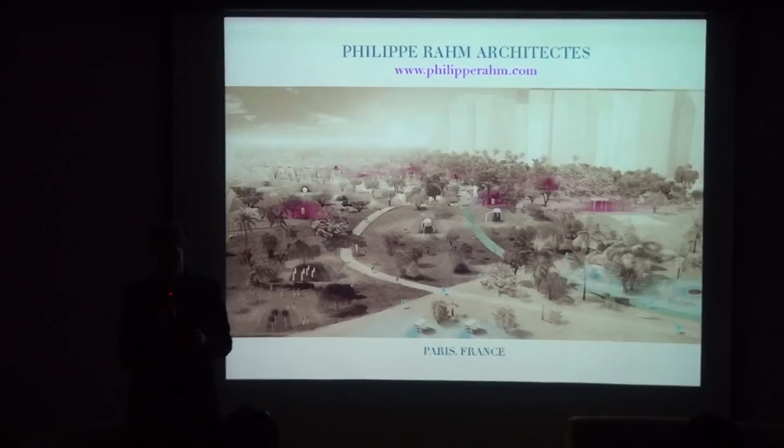It will be a different project. Of course, I will present the Jade Eco Park for Taichung. But before that I will show some other projects, and try to explain a little my position about architecture, how I consider architecture. I don't know how we could do this.

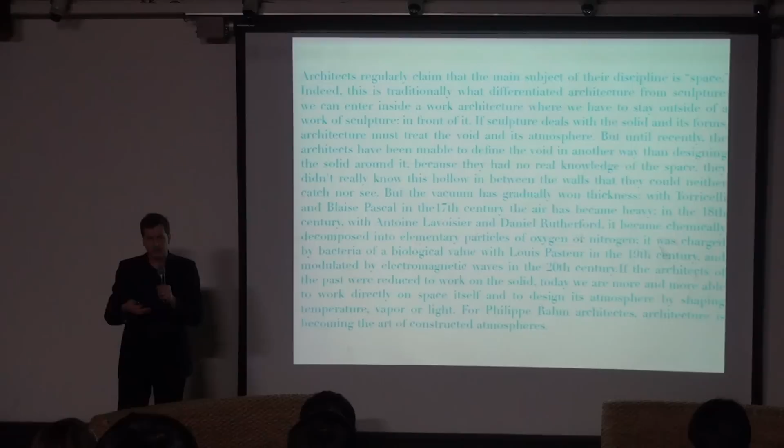And during the 18th century, we also discovered that the air is not one element, it's not something unique, but it's composed by different gases like nitrogen, like oxygen, and it means that there is a kind of chemical quality inside this void. Then later, during the 19th century, we discovered that there is also some bacteria, some virus inside, so there is a kind of biological life. And during the 20th century, we understand that there are electromagnetic wavelengths, like the light, the mobile phone electromagnetic waves, all these invisible waves that are inside the space.

So it means that in reality, the space is a real material. It's not empty, it's a real material. And as an architect, maybe you could start to design the space itself. You could think maybe before, because we didn't know what was the space, so we designed the envelope of the space. We were designing the wall, the ceiling, the solid around the void. But today, we have the knowledge and we have the tools also for starting to design the space itself like a material.

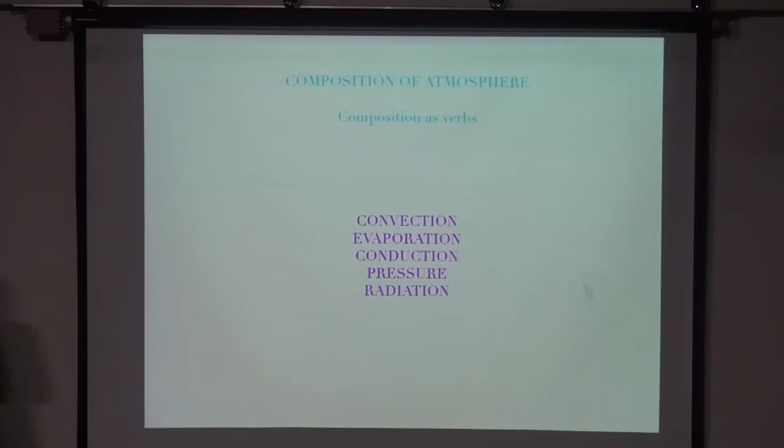So traditionally, when we as an architect, you were working with elements of architecture. During the 19th century, there were some encyclopedias or dictionaries that showed the different elements of architecture, like a column, a wall, a stairs, a room. That was like solid elements to compose, like elements of architecture. And then you have also elements of composition, like symmetry, asymmetry, or addition. For example, you add a column, or multiply the column, or you add one room to another room, so it was like elements of composition.

But today, we could think that maybe we could move from the solid to the void and start to think that the element of architecture could be the emptiness, the element of the space itself. So the element of architecture could be today heat, light, temperature, humidity. It could be all these elements that compose the space itself, where we are really, what composes really the architecture and the space. And the element of composition, maybe it could be no more like symmetry or addition or inclusion or multiplication, but it could be some meteorological phenomena like convection, evaporation, conduction, pressure, radiation, all these elements that make movement with the element of architecture.

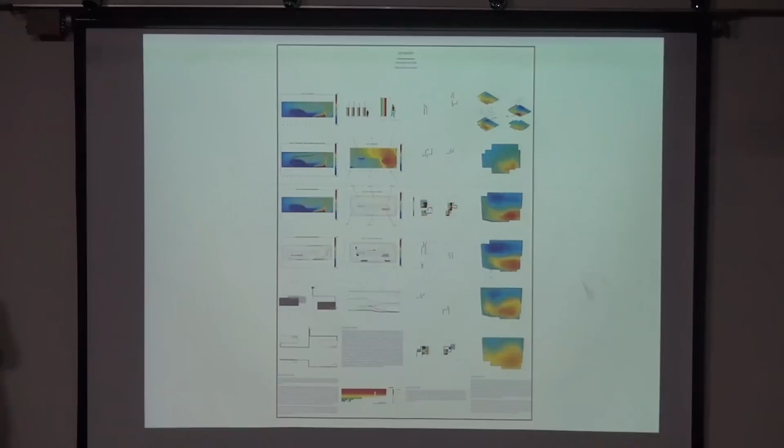Some other projects are based on evaporation, so it's because there is all this question of humidity in the air, and one of the challenges of architecture design is to deal with this humidity, like with the ventilation, or to put some fresh air and to move the exhaust air somewhere else. So we work on this kind of element.

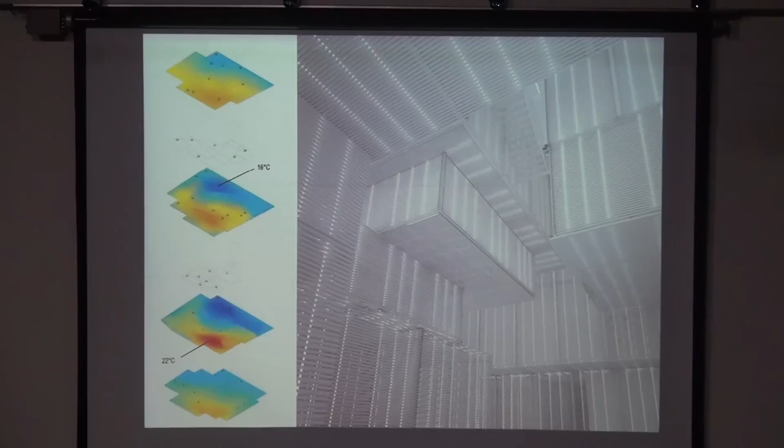So I would like to be more clear maybe by showing a first project we made in 2008. So it was at this period we start to analyze convection as a design tool for doing architecture. And for this project, we start with two different criteria. The first criteria was a Swiss criteria, a Swiss recommendation, Swiss standard to economize energy and to reduce oil consumption and in order to reduce the greenhouse gas effect.

And for this, there is some precise minimum and maximum temperature according to the clothes and according to the movement of the body. And for example, this is something obligatory for public buildings, and this is something like recommendation for private buildings. But it says, for example, that a corridor or stairs, could be warm. This is for a cold country. In Switzerland, you need heating system all year except a few months during the year.

But it could be exactly the reverse position for Taiwan because it's with air conditioning, not with radiator, but with air conditioning. But here it said that the corridor, the stairs, could be warm only at 15 degrees Celsius, normally in a normal condition you need 21 degrees Celsius. It's like the minimum standard of comfortable temperature. But they say in reality for the stairs it could be warm only at 15 degrees Celsius, because you don't stay a lot of time inside the stairs, and you also move the body and create your own energy by moving the body. So it could be only 15 degrees Celsius. So it means that if you don't warm the stairs at 20 or 21 degrees Celsius, but only at 15, you will economize 6 degrees all year. So it means at the end it will be a big economy of energy.

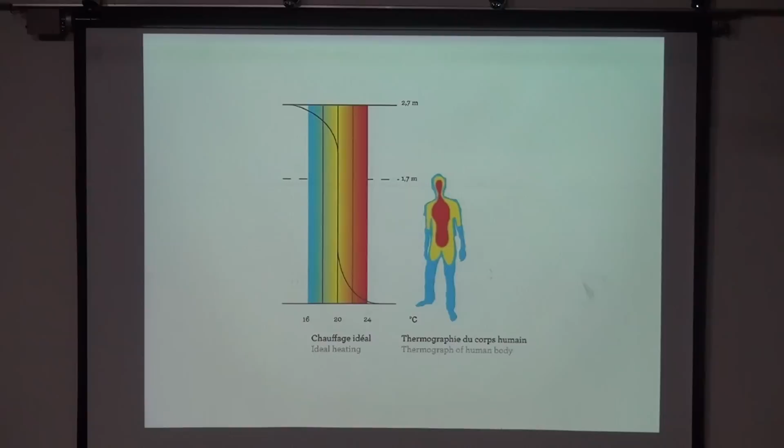Is it possible to create this reverse curve? In nature, there are some phenomena where this reverse curve exists, like currents such as the Gulf Stream in the sea, because it's linked to the difference between salt water and non-salt water. Since non-salt water is lighter than salt water, it creates the Gulf Stream in the ocean.

We propose to build a kind of meteorological section, and we introduce two radiators at different temperatures: a warmer radiator and a colder radiator. By creating this imbalance—moving the warm radiator down and the cold radiator up—we start to generate a flow of air that moves, touching the cold surface and going down, generating a stream.

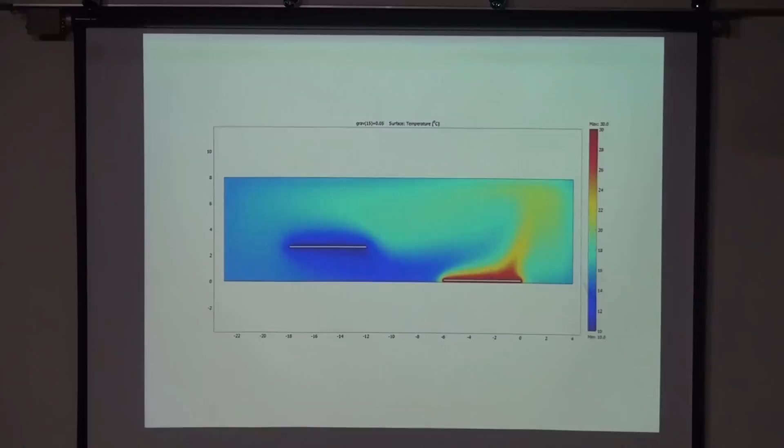For this project, we start to think that the whole building will become like a meteorological climate. We have introduced in the section the lower part of the building's temperature at 15 degrees Celsius, which could be stairs but also storage. And we introduce the higher part of the building that has to be the office, the working space. We place them inside the section, and then it generates an entire climate inside the space.

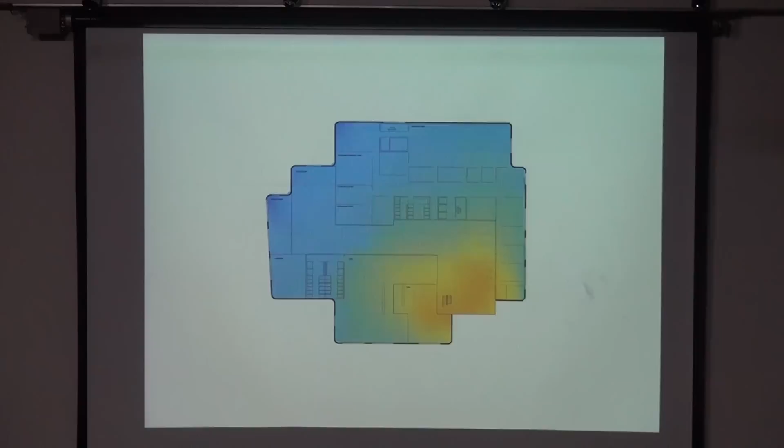So it means that we follow the movement of the temperature inside the building, through all the space, all the stairs—this is the first floor, second floor—so the heat becomes bigger.

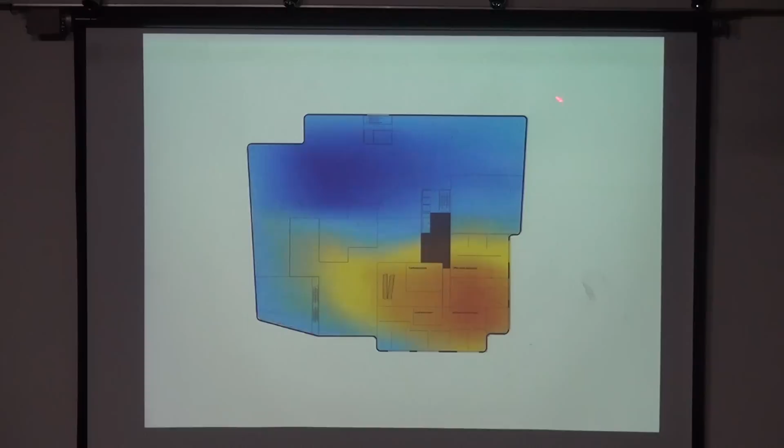So the storage changes shape, and the exhibition room is here, and by going higher the warmer space becomes bigger, the storage becomes smaller, the exhibition room is in between. At the top of the building is a very little colder area and a big warmer area. This is how the shape of the building is organized according to different temperatures, and all the form moves through the plan to find different temperatures.

I will very quickly just show this project. It was a little the same idea to work on meteorological phenomena, but if the first project was inside, this project deals with outside conditions, because it was a very big building that would create a lot of shadow on the north, on social housing that are there. So we proposed to dilate the space between the rooms, to let the sun go through to the social housing behind.

And we did the same strategy for the wind, because we have a cold wind coming from the north that would be blocked by the building. We proposed to open the building to let the wind go through, so it would not stay cold at the back of the building. By opening space between the rooms, we use it as a tank for creating fresh air that could be naturally warm during winter or cold during summer.

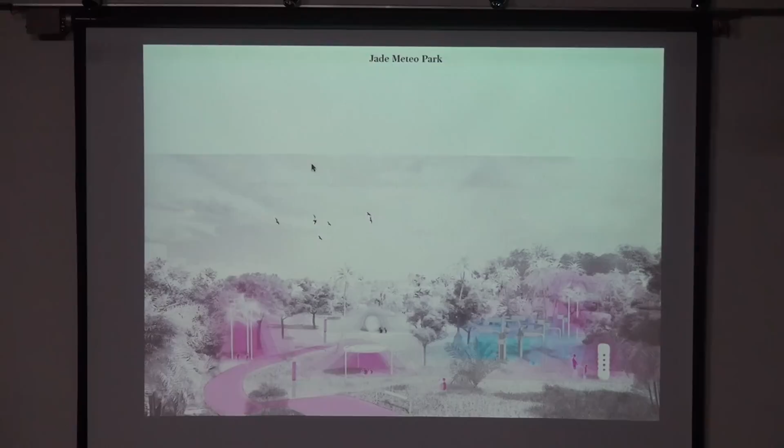give the clean and a more cool and more dry area. So for doing this, we start to think that these three elements, the most important climatic elements to do the park, will be the heat, the humidity, because it's warm and it's humid, and the pollution. So how to deal with these three targets? And so we first start to think on the site.

On this site, is there some place where it will be a little colder than some other? The sun will be always the same, the temperature will be always the same. There is only one factor that is a little different: it is the wind coming from the north. We know that there is a north wind coming from the north that is blowing all the year, and also during the summer. Of course, during the summer there is a southwest wind that comes from the sea, but there are a lot of days also where there is still the north wind coming there.

So this cold wind, the temperature of this cold wind is a little lower than 32 degrees, because we know that 32 degrees is a limit. When a wind is warmer than 32 degrees, it becomes not comfortable, it's a warm air. But if it is lower, it will bring freshness like a fan, and it will affect the comfort of the body, the perceived temperature, because it will refresh the body by the movement of the air.

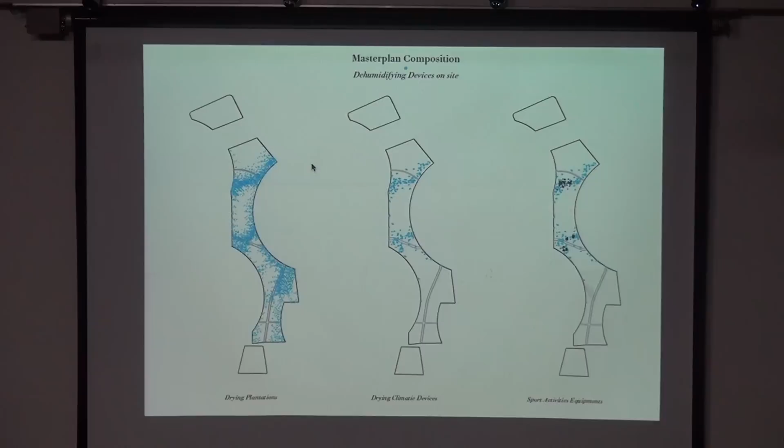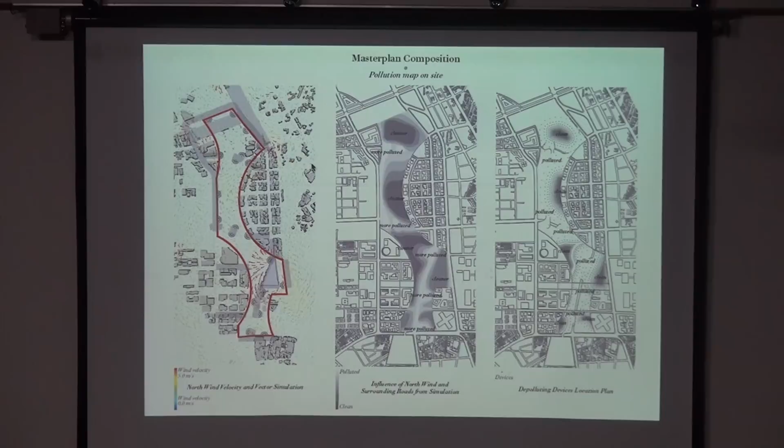So it means that from this climatic analysis we have generated 3 maps, 3 layers, and these 3 layers overlap together and create some different situations.

So it overlaps, and it also generates different qualities. Sometimes it will be cool and dry and polluted, or cool, dry and non-polluted. So it generates a diversity of areas that will be the richness of the quality of the park.

And then we propose to have 3 main roads inside the park that connect all these microclimates together. There is the blue path connecting all the sport and dry areas, a path that goes on the hill and down, more for sport, for jogging.

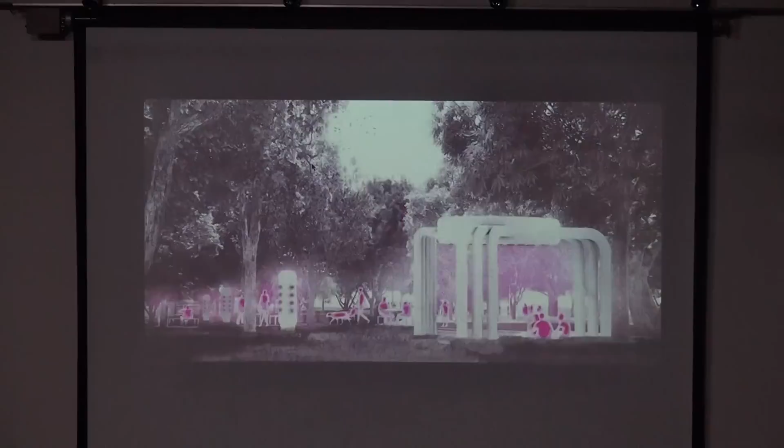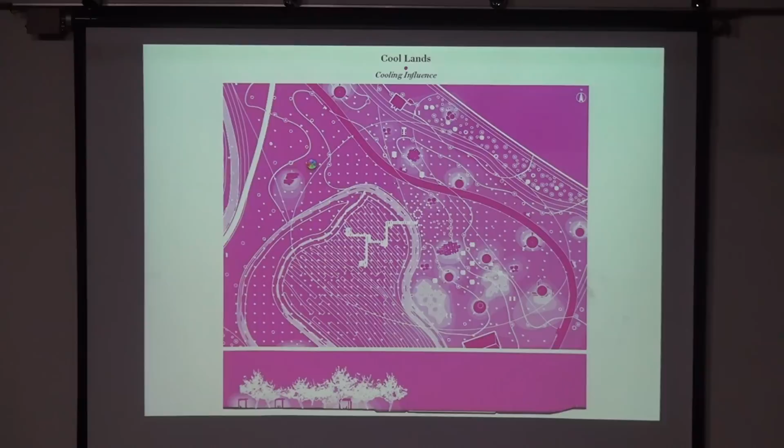And this is the Cool Lands. We have 4 Cool Lands in the park, and these Cool Lands will be the place where there are a lot of trees, cooling trees, and a lot of cooling devices that will be there. We wanted to give an identity for each of the Cool Lands, and we tried to find trees and choose them according to their cooling type, cooling capacity.

So some trees will have a lot of leaves, it's big and creates a big shadow. Some of them have big leaves that create a large shadow. Some are white leaves that reflect the sun, and some others evaporate water, so it's cool because it's like a fountain, creating a cooling effect. So the choice of trees is in order to cool the area. It's a precise choice, and we find one more specific tree for each Cool Land.

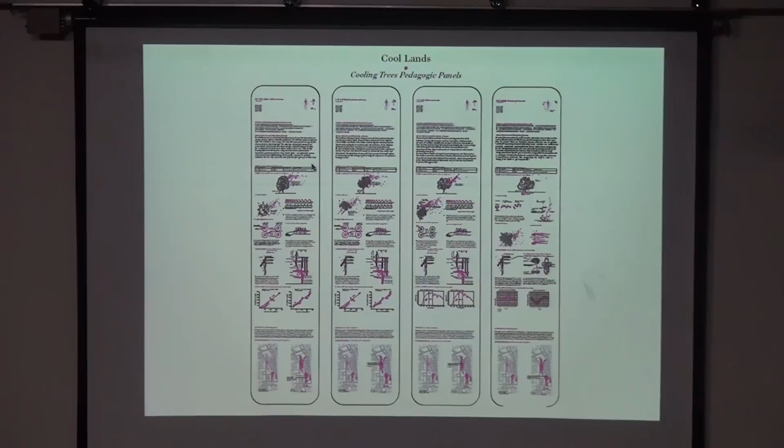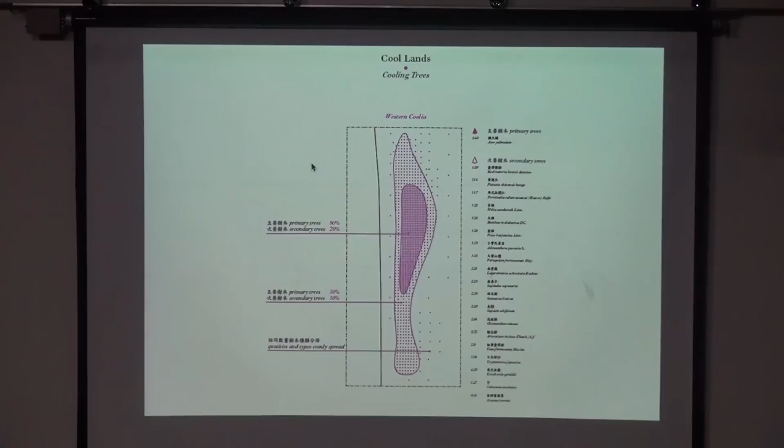And in this area, when you go inside, you will find also some architectural devices. The total is like 260 devices. Half is passive, like a structure, a shelter against the sun. But some others use different meteorological techniques to cool the air - some use pressure, so it blows cold air. Some others are like artificial rain or cloud, blowing mist or droplets, and when there's evaporation, it takes energy from the air, refreshing the area around it. Some of them work by radiation, a cold network of water that runs through, and you could approach and touch this cold surface. And some, like this, are just passive.

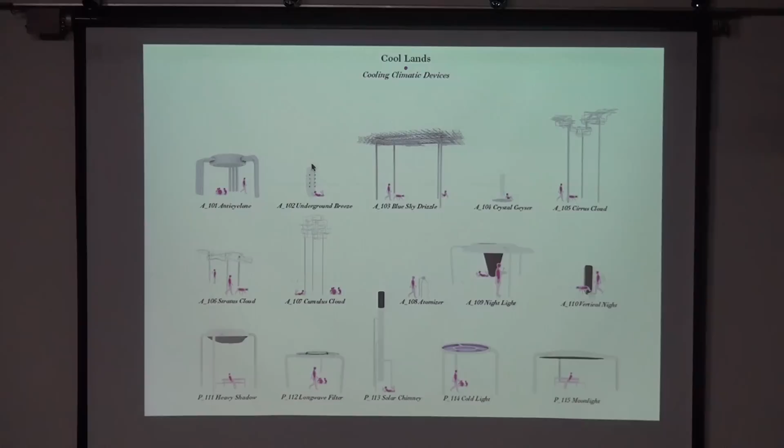I would like to present only two of them. So the first is anticyclone. This device will blow some cold air, and of course everything in the park...

We have 7,000 square meters of photovoltaic panels on the north of the park, and we will use this green energy for all the lighting.

I will show it later, but for these devices we have only natural passive cooling, so we have only a fan, and we have studied with our engineers all the influence at different moments of the year to see what the size of the pipe should be, the quantity of air, and the speed of the air.

The technique is very traditional, because it takes the air, and the air goes through a heat exchanger with the city water, because the city water in Taichung is around 27 degrees all year round.

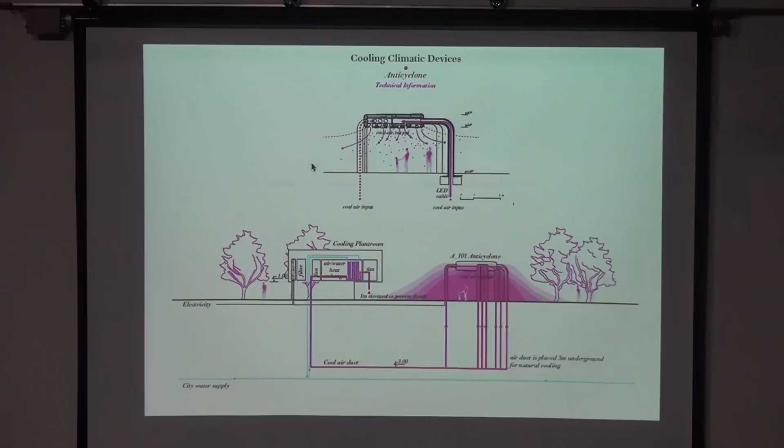Another device is what we call cloud. We have different types of cloud. It's an evaporative device.

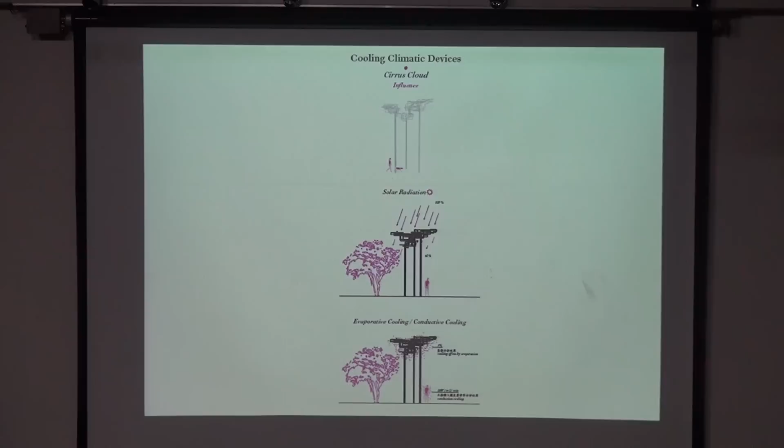So it will be a mist of water, and when there is this change from liquid, a small droplet of water, when it goes out and evaporates, it takes energy from the air and cools the area.

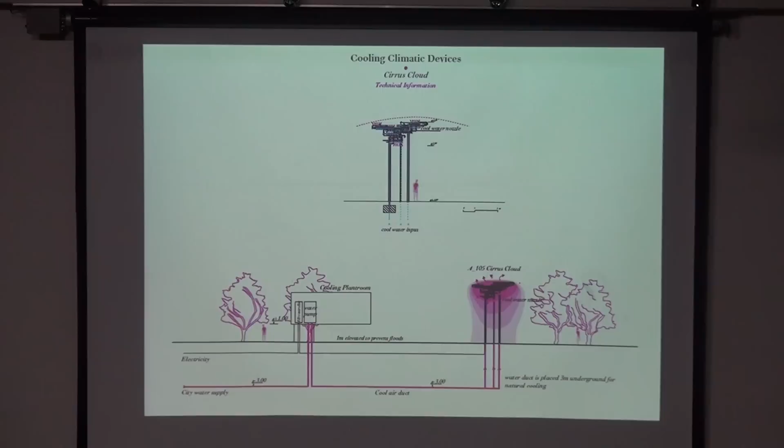So it's a more traditional device because it's a little like a fountain or jet of water in a park.

For the dryer, for the most humid areas, we have all these drying trees, and we add also some different devices.

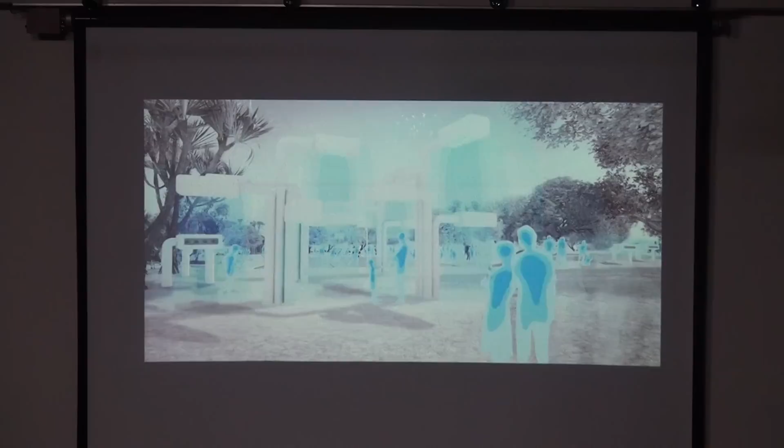This is one of the devices, we call it dry cloud. This device will provide some dry air in the space.

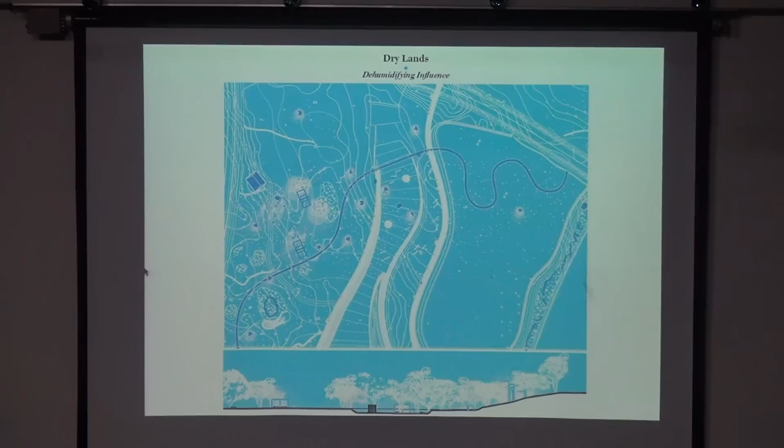But just to explain, before the dryer, we also have some different trees that will absorb the humidity of the air with their floating roots.

This is a shelter against rain, and this is the one device that blows dry air.

This device uses, so it's the most complicated technique we have for doing this, but we use air and it goes through a silica gel bag, so it's also a natural way of cooling.

The silica gel absorbs the humidity, but after the silica gel bag is full of water, we need to dry it with a network of warm water that goes inside, and so the bag has to stay without action for a few hours.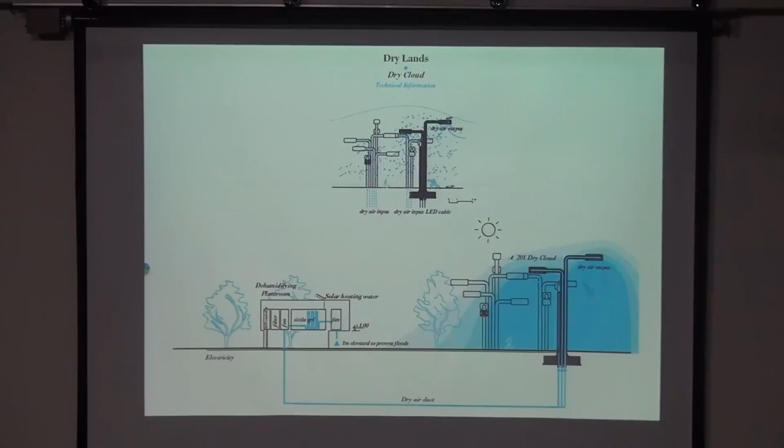And then the dry air will be blown from the devices in the park.

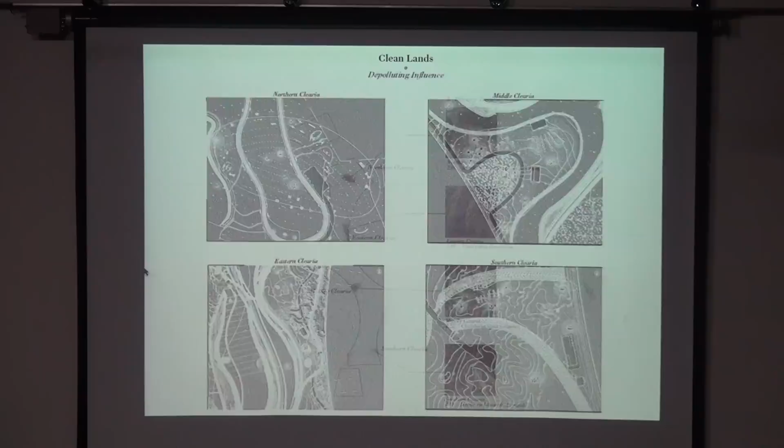And for the last map, we have what we call the clear area. We have 4 clear areas, so it will be the less polluted and most clean area in the park. For this clear area, we chose specific trees that have a depolluting action - trees with a lot of hair that catch pollution in the air, trees that absorb gas pollution, or trees with a big trunk to absorb noise. We gave different specificity to these trees for the 4 clear areas, according to different depolluting trees we find place there.

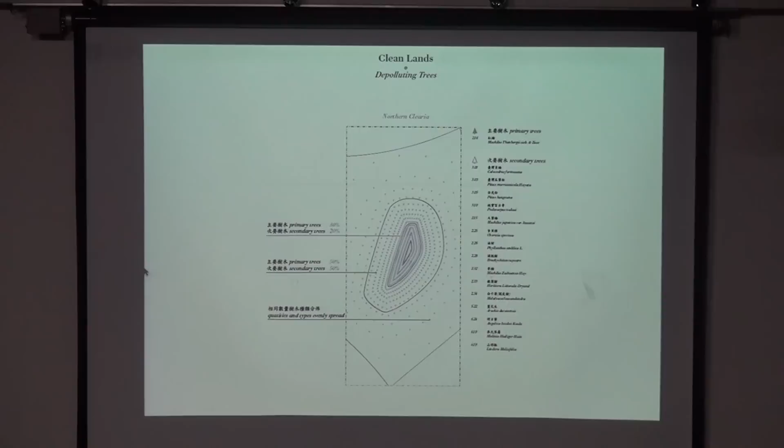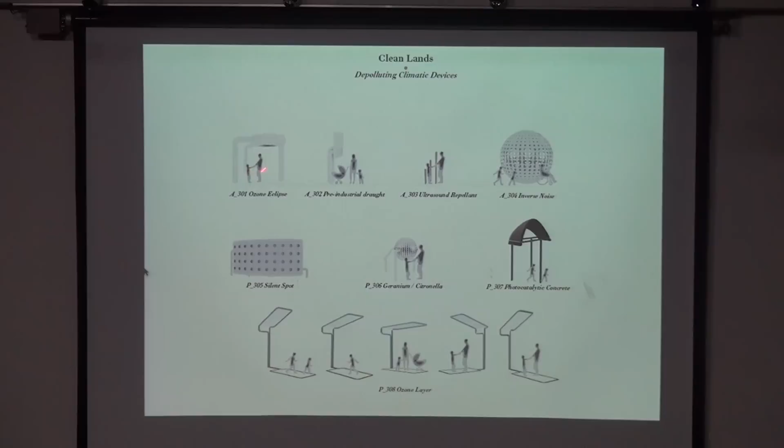And so sometimes in this grid we change one-to-one architectural devices. That could be a noise or sound wall, or it could be photocatalytic rocks that transform and absorb the pollution of the air, or it could be one fan that blows some clean air. This is like the ozone eclipse - like an eclipse of pollution inside the air.

And so this is a device where we take the air from outside, and then it goes through different filters - the gas filter, NOx filter, O3 filter, or particle PM2.5 filter - and then it goes down and flows clean air under the devices.

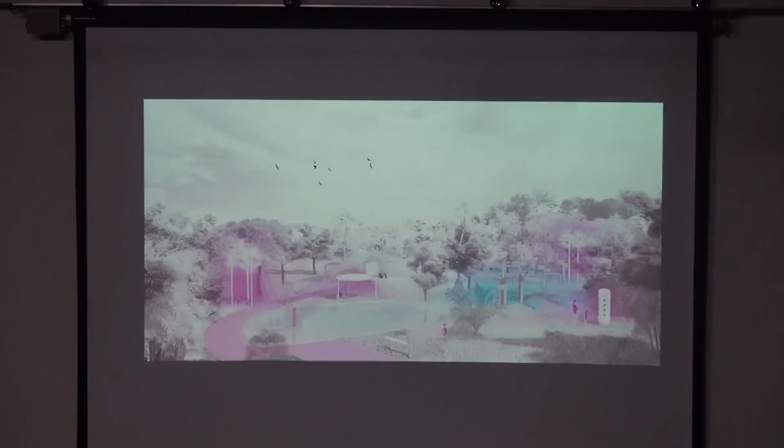So quickly, I would like to show how there is a kind of intelligent system for the park, because we will have a grid where every 50 meters we have a sensor that will measure in real time the temperature, the humidity in the air, the pollution in the air, the noise, and the wind, and everything. And this sensor gives information to the computer.

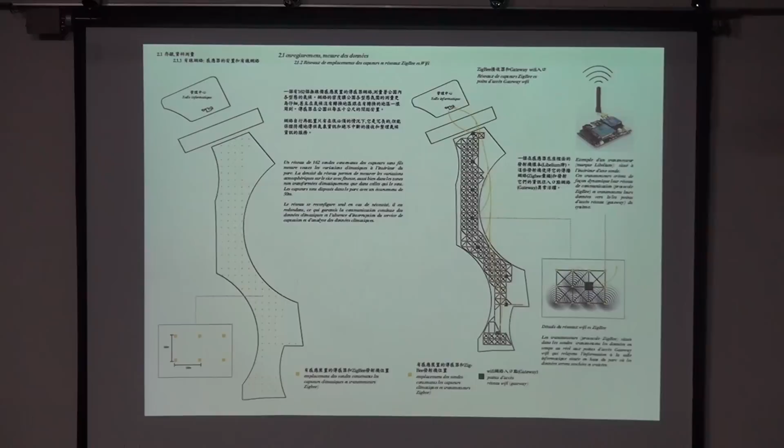This is a sensor that measures all these parameters, and from it goes to the computer, and then the computer will generate in real time the map of the park for the temperature, the humidity level, and the pollution. It will give information also to your mobile phone, so when you arrive in the park you could know exactly where the most cool area or the most clean area is. So we could see in real time where to go.

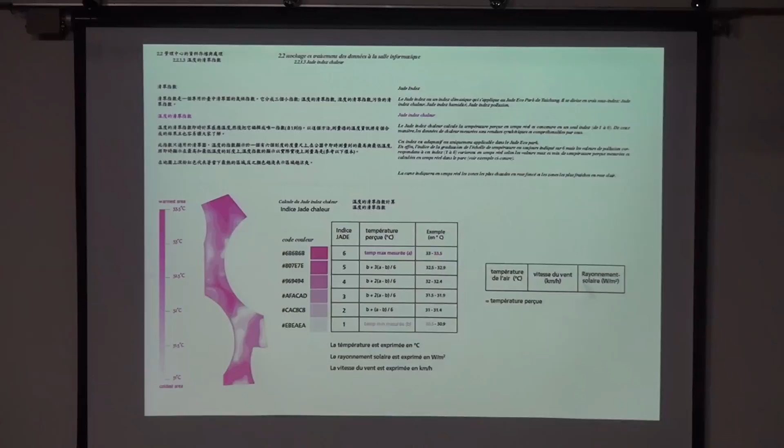And so we will compose an index, like on a scale of 6. You could see in white the coldest area you will find, and in red the warmest area, and it will be updated every 2 minutes, every 5 minutes. So you will find in real time the heat on site, the same for the humidity level, and the same for the pollution. We will create an index that mixes the different parameters of different pollutants, showing the less polluted area. So you could decide, when you arrive in the park, to go to the less polluted area at the current moment.

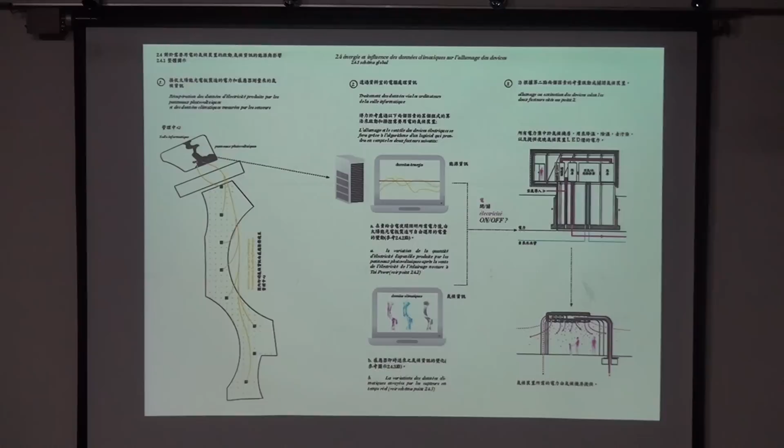And according to this, we have also a smartphone application, so you could see directly some information about the climate in real time - you will know where you are and where the different parts, like the toilet, are located. You will find in real time the temperature in the park and where you are, so you could see, okay, here it's too warm, I could move there, it will be more cool.

And the same for the humidity, the same for the pollution, it will give in real-time the real level of pollution. Then there are recommendations for different activities, like whether it's good to do sport at this moment.

So you have all the detail of the air temperature, the wind speed, the sun radiation given inside the app. You could also scan the different devices and trees to get information about the type of trees, the climatic quality of these trees, and the action of these devices.

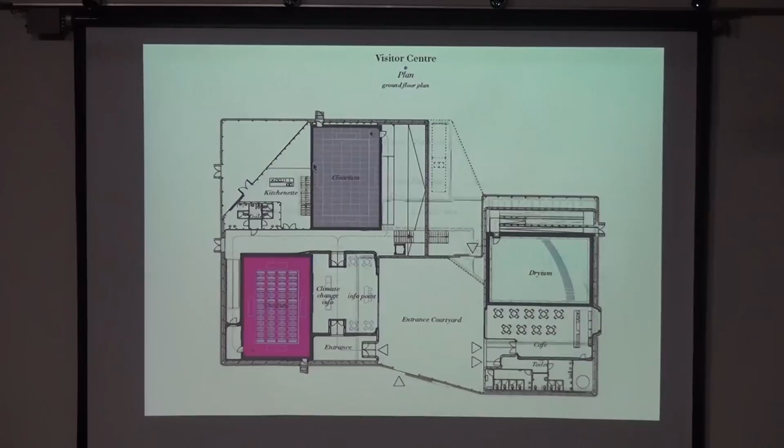And inside this building we will find three rooms. One room will be called Coolium, the space of the cool. The second one will be the Dryium, the space of the dry. And the last one will be the Clearium.

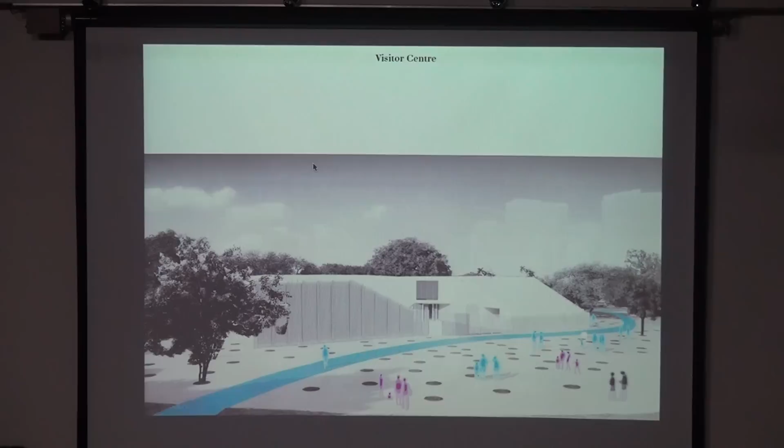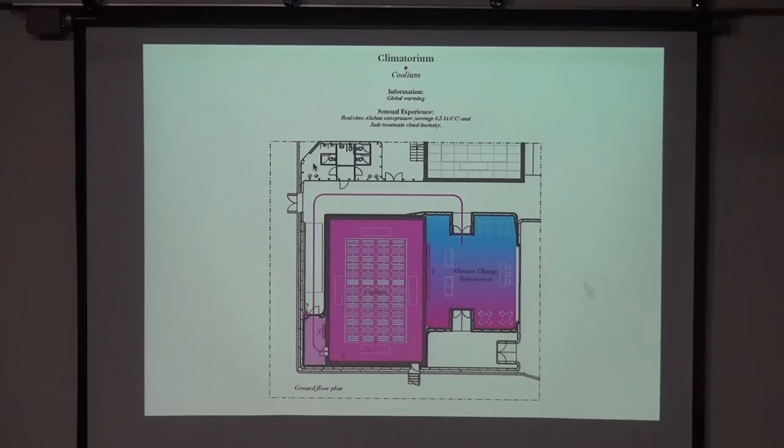So in the first room, it will be to go and feel the coldness. The idea is to reproduce in real time the climate of Alishan, like the Jade Mountain. When you go inside this space, it will be like going up in altitude, since the temperature according to the level of altitude is different.

Inside this space it will be like a small project we made for the Biennale in Venice - like the Jade Mountain, the white mountain, like snow, the reverberation of the snow. The light comes from the ground, and it will be cold and white, like being in the snow in the mountain in real time.

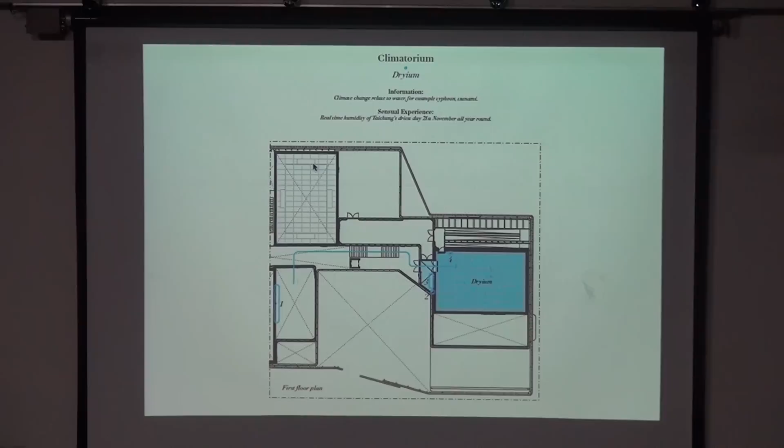The second space will be the Dryium, and in the Dryium we think about the most comfortable moment in Taichung, and we say that maybe it's in November because humidity is lower in November and December.

This is what we see on this drawing - this is the level of average humidity. Maybe we could consider that the 21st of November is one of the most comfortable days: the temperature is not so high, not so low, and the relative humidity is not so high.

So we propose to reproduce endlessly, without interruption, an endless repetition of the 21st of November. When you go in this space, you will have the light, you enter there, and you will get the climate - not in real time, but if it is the 15th of July at 3pm, you will find the temperature and relative humidity of the 21st of November at 3pm.

And the light is moving, we have the light inside that takes the same direction as the sun of the 21st of November, the same angle. The floor we will walk on is a glass floor, so at noon the light will be there and it will turn. If you come at night, you will see like a transparent planet, you will see the light under your foot that goes and turns, and it's every day like an endless repetition of the 21st of November.

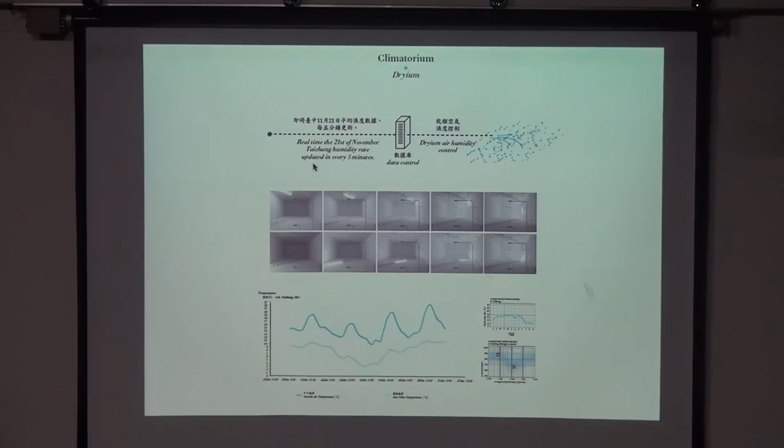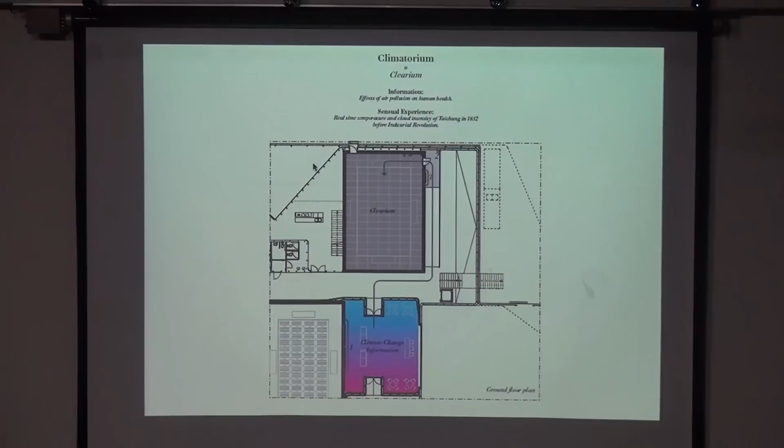So here we will reproduce the climate of Taichung before the pollution. So it means before the Industrial Revolution in 1832, during the 19th century, and before there was car pollution and industry pollution.

So for doing this, we will create a space that will be open, but we will blow some clean air inside, and the temperature will be 1 or 2 degrees less, because there is global warming that changed the climate by 1 or 2 degrees since 1832.

And also we will produce some cloud in the sky. It is open, but we will produce some cloud, because we know today that with global warming the cloud coverage could be lower, since it's linked to the evapotranspiration or transpiration of plants. If the climate becomes warmer, the cells of the plants close, so there is less water going into the sky and less cloud. This is a very new study that shows that in the future it will be less cloudy than today.

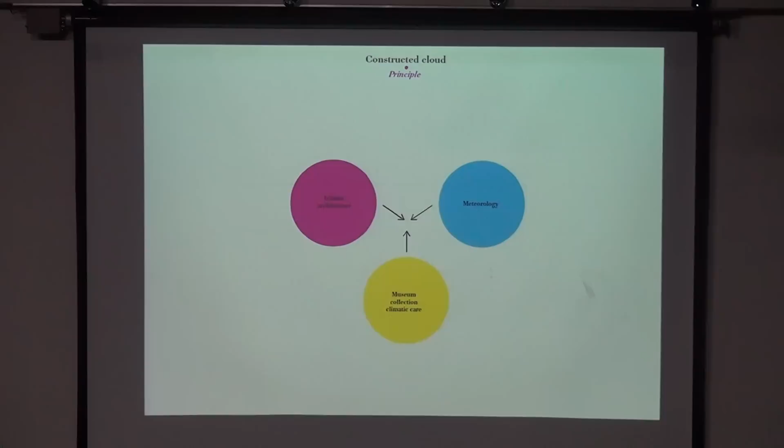I don't know if we have time to just show a very new project we are working on since December. It's a project, like a very sketch design for a new museum in Qatar, in Doha. Qatar has a very dry climate, but it's the same latitude as Taiwan, as Taichung, though it's very dry and very warm during the day. So we propose to do a mix between three targets: meteorology, conservation of artwork, and traditional architecture and Qatar culture.

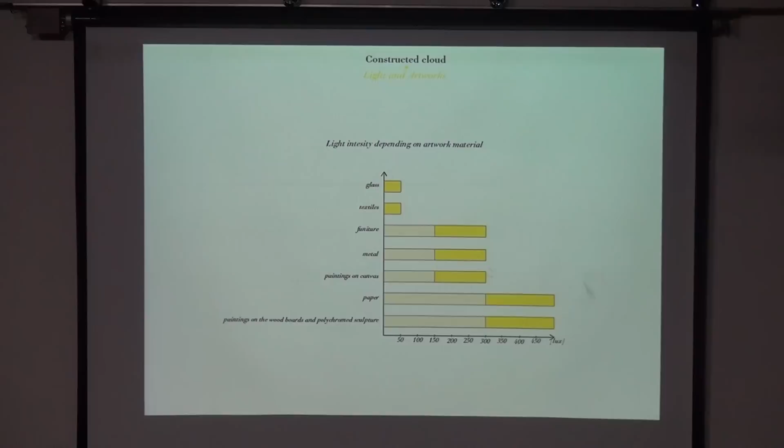And for doing this we first analyze the light, and the light in Qatar is very high, so it could be 100,000 lux during the day. And of course for conservation, if you have artwork, you need to have only, depending on the material, if you have paper, you must have 300 lux, because if you have more it will destroy the paper and destroy the artwork and the ink. So it means we need to reduce, we need to reduce very strongly the light intensity.

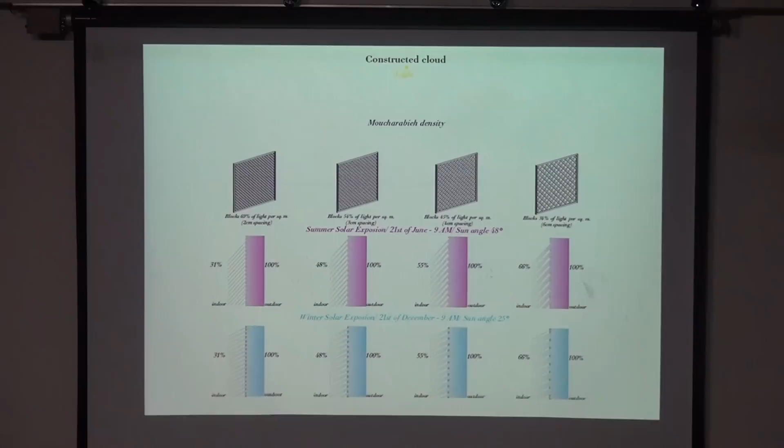And so we propose to do this work on the first layer of the building, which will be reduction of lighting. And how to do this? We have analyzed the albedo, but also the moucharabieh, the traditional way to reduce the light, and there is something interesting also, a colorful moucharabieh. And as I said before, in reality the heat coming from the sun is about 50% inside the visible spectrum, and 50% inside the infrared.

So if you filter the infrared and also a part of the visible, you could reduce the heat coming from the sun significantly, if you use only cyan light wavelength it would be only 7% of the heat.

So it means we propose to divide the natural light into different wavelengths, to keep only one specific wavelength, and then let the sunlight come onto the cyan panel, then there is a reflection on the white panel, and it goes back, and the same for the magenta and for the yellow. By addition of these three colors we will recompose a white light, but with less energy and less intensity. So we have all the white lighting, we have a division and recomposition, but with a division of the intensity of heat.

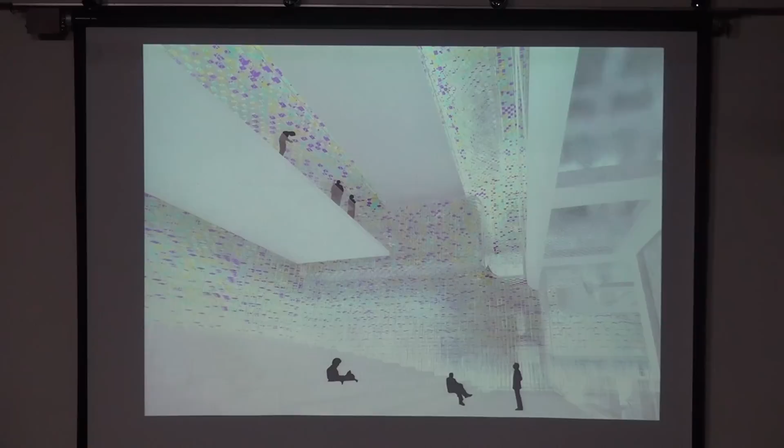And this work will be on the first layer of the building.

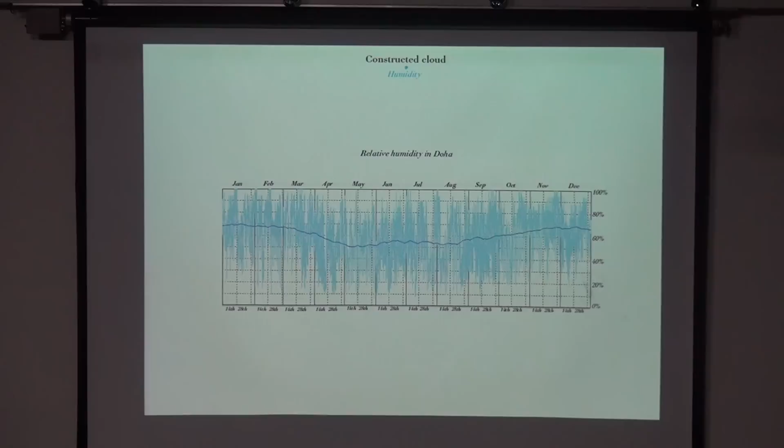And this is some horizontal element, so it lets the view through but blocks the sun rays. The second layer is about humidity.

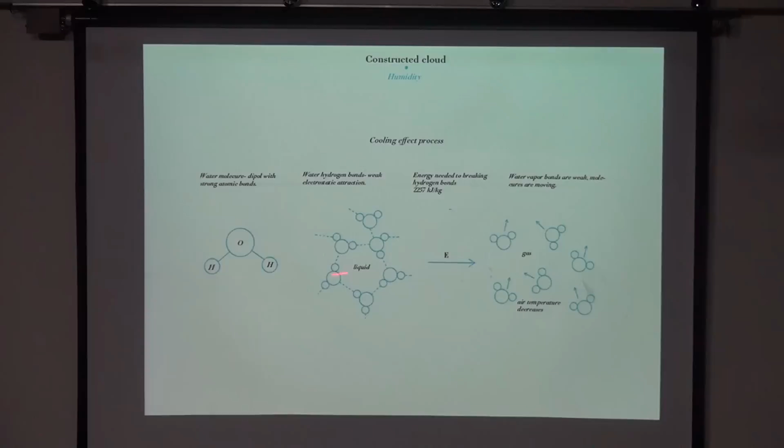It's very dry during the day, and museum recommendations say you must have something like 50% relative humidity to preserve the material of the artwork. In traditional Islamic architecture, there's the use of fountains that evaporate water and cool the air, because water molecules are bound together, and when separated by evaporation, becoming gas like in the fountain, it needs energy that comes from the air, cooling the temperature. So we propose an evaporation of water on the second layer to increase the humidity of the air, which is very dry during the day, and to cool the air by evaporation too.

We use salt from the seawater, and during the evaporation phenomenon the salt falls down. Because humid air is lighter than dry air, the humid air naturally rises up to the museum.

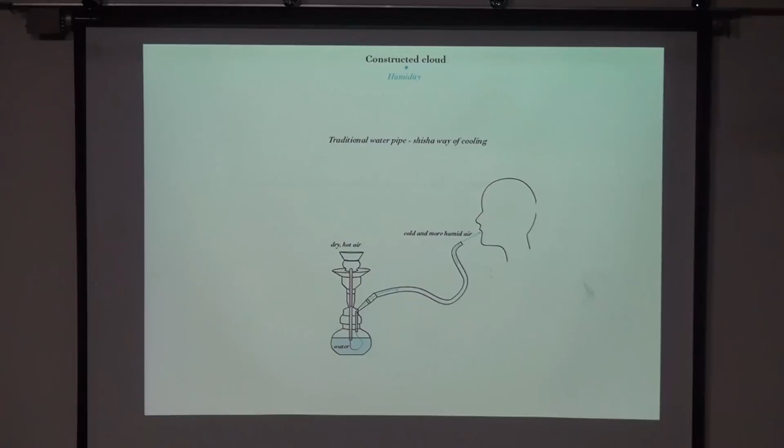It goes inside in 12 hours, meaning that during the day you feel the night's coldness, and during the night you feel the day's warmth. We propose the same with water. Depending on the thermal coefficient, it will be only 30 centimeters, creating the last layer of the museum. Because this is a horizontal panel, there is radiation with the night sky vault that will cool the water during the night.

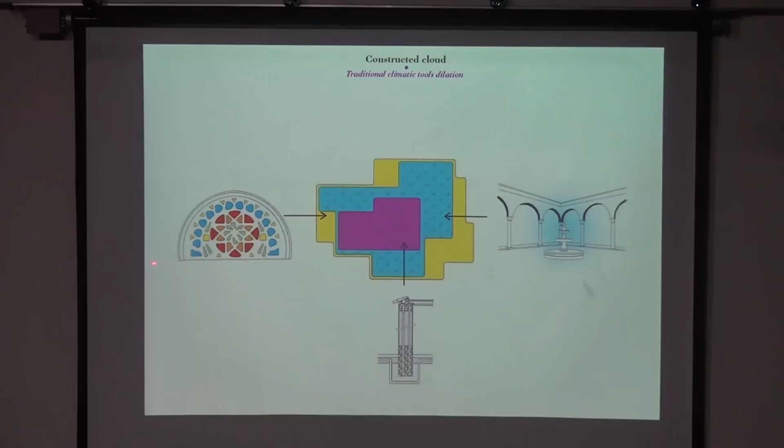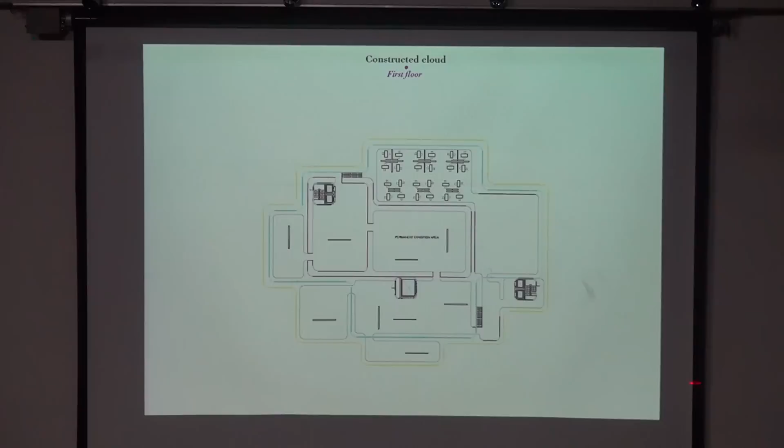So the museum, this is a plan showing the lighting, the humidity, and the inertia taking place in different layers. This is the first sketch of the project. The plan is that inside, after the water wall, there will be a very white cube, a very traditional exhibition room, and here an air-conditioned space using natural evaporation. It will be exhibition space for artwork but with natural lighting. And the last, in the yellow line, will be outside, like an exhibition for artwork outside.

So thank you. I think we don't have to translate.

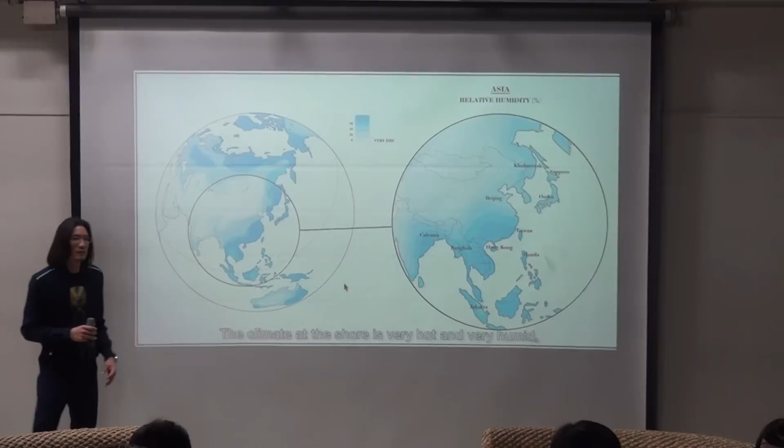About the project you did for the park in Taichung City, the local legislature has criticized it. They think the overall concept was very nice, but they're afraid the budget won't be totally acceptable, and they also question the functions you're trying to reach, especially for temperature control. They are questioning whether it's possible to realize it, so can you say something about this? Whether it's possible to achieve, or if it's just a project or design coming from your imagination?

I think the client is here, and of course the budget is very controlled. We had a successful first tender for the first part of the project, and it was about 10% lower in price than what we calculated, so it was quite good for us, a good surprise. I think it was also my work to really fight against over-cost design during the process, and we always wanted to stay in the budget and never go higher. We did it really seriously, and personally I take care to reduce things when some parts become too important, and to alert the client sometimes that a part is becoming too costly and we need to stay in the budget. So we really did do it seriously.